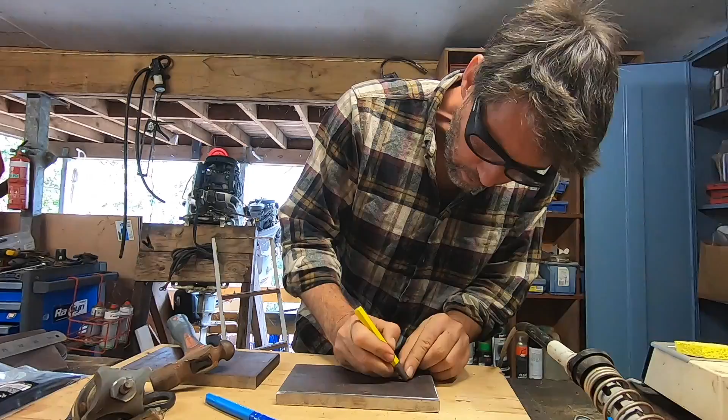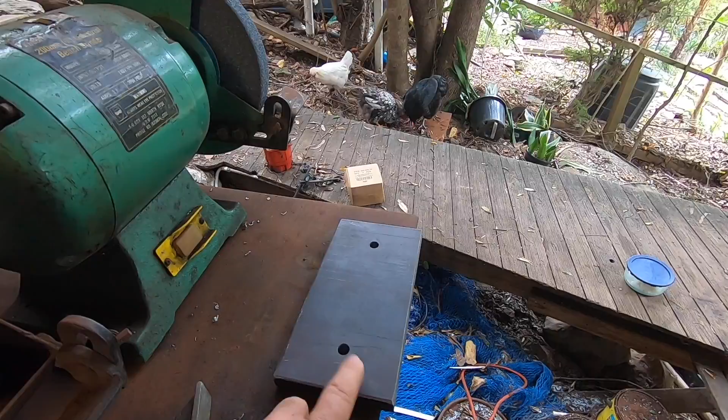Alright, on the way back from Bundaberg I stopped into a steel supply store in Brisbane and bought the steel I needed so I can get on with these engine mounts, so let's get making them. These are the shims, the metal shims I'm putting in. You can see they've got a bit of a lip here. I'm not sure how they were cut. They were cut by the steel supply place, which is why it's such a nice smooth cut, but I'm just going to clean it up so A, I don't cut myself on them, and B, I've got a little bit of a bevel for welding them in.

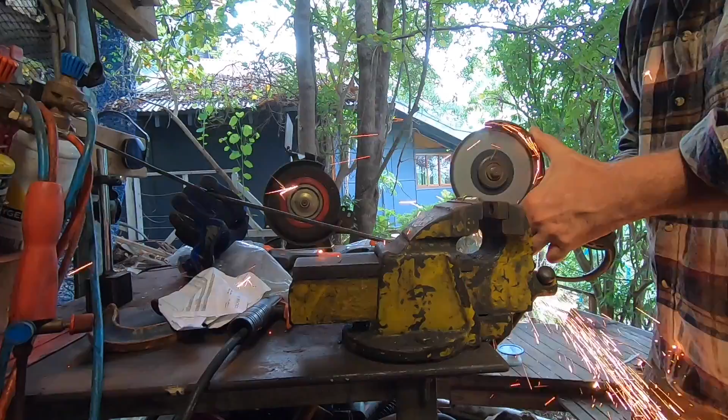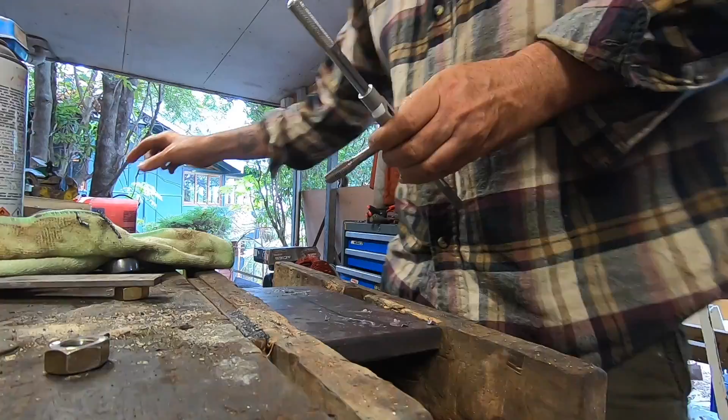Got to say, I think it was $5 a cut, and with thick steel like this, it's money well spent. The time, the noise, the dust, and the cost of grinding discs or whatever, or plasma cutting it and cleaning the plasma cut up, it's just the best $5 you can ever spend getting the steel supply place to cut stuff to size if this is what you're after.

Alright, to do this, I've just put a straight edge on the 8-inch mark, so 8-inch is a little bit over. I think it's 1/8 of an inch. 1/8 of an inch over this side, so they line up, and then just come in 1.5, in 1.5. And that gives us our 5-inch centers centered on the plate.

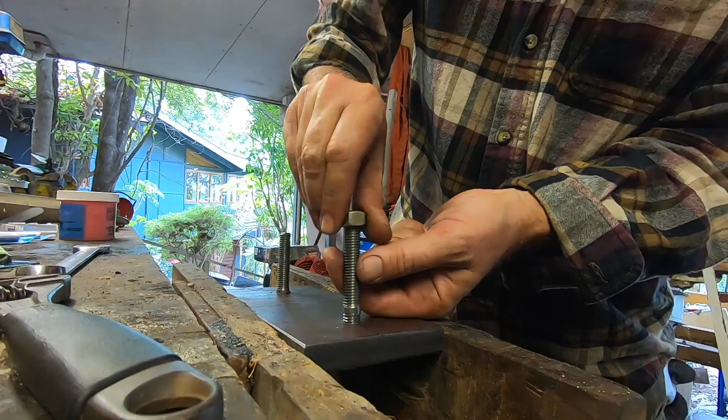Okay, plate drilled up alright, so now I'm going to have a go at tapping these threads and putting the studs in. The studs here are actually too long, so I'm going to put some nuts on them, cut them down, wind them off, clean it up a little bit. Probably just need to cut about 1 inch off, maybe 1.25 inches.

So I'm just going to put a couple of nuts on this so that I can repair the thread a bit when I pull them off, and also so I can put them in the vise when I'm cutting them. Obviously we're cutting from this end because the short end is the end that goes into the plate. The right tool for the job here is the hacksaw, but that takes effort, so I'm going to use an angle grinder.

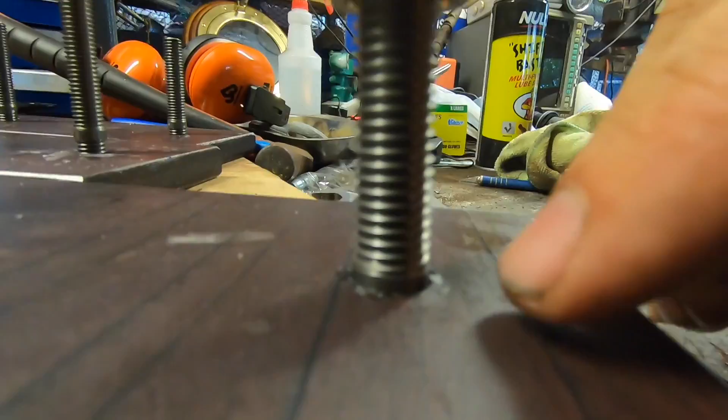These are actually a little bit hard to tap because I think the spec for a 12mm metric hole is maybe like 10.7. It actually changes based on thread pitch. So I drilled it at 10.5. So it's actually going to be a little bit tight, but we'll get there. Yeah, it's a bit too much, isn't it?

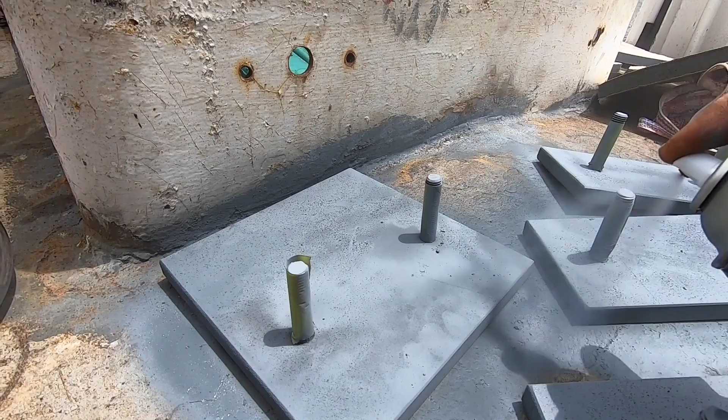I bought an 11mm drill bit as well in case this turned out to be too hard. But I'd rather be a little bit under spec than over, so there's more thread, it'll be stronger. Just means the tap needs to do a little bit more work. Although I've got to say, this Boelube really does do wonders, made the drilling much easier too. I'm pretty impressed with it.

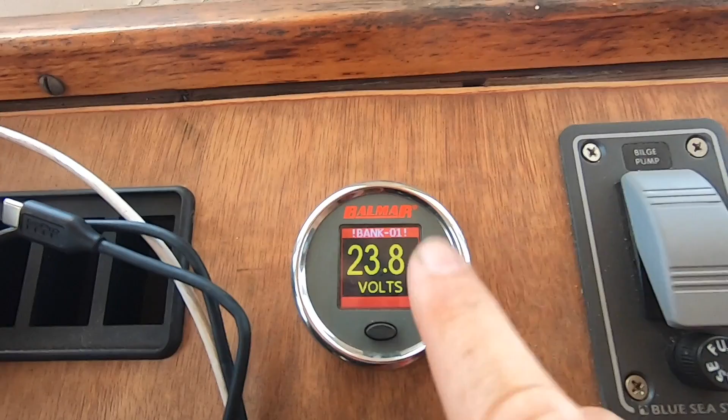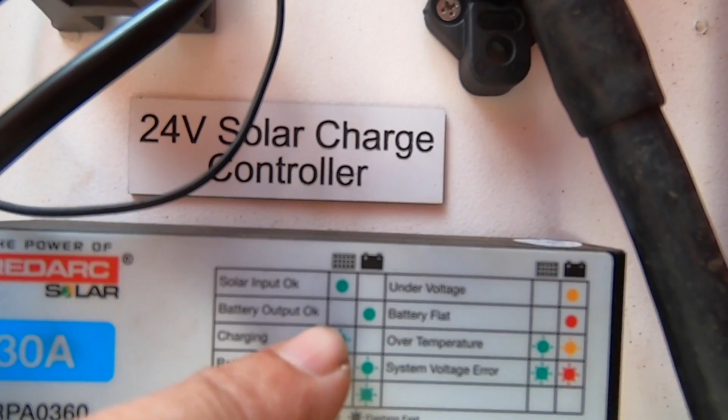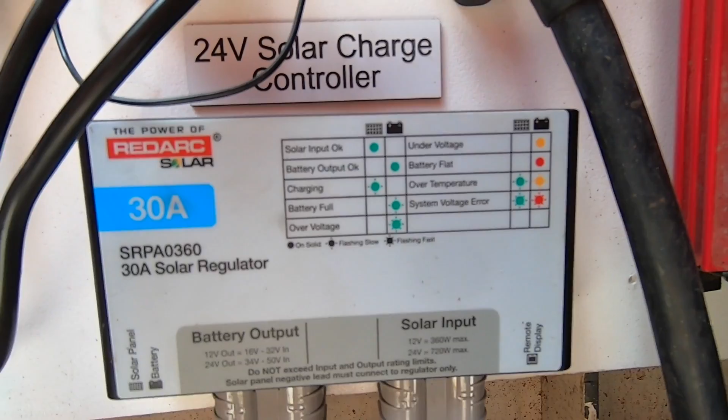Alright, time to put these cut down studs in. I'm in two minds whether to put some Loctite in, but to be honest, I really don't think it's necessary. Could do a little tack weld on the back if I was really worried. I may have issues down the track and want to replace one or two, so let's not go overboard.

I've fallen back into the habit of assuming you guys have all done this kind of thing a million times before, but if you haven't, the idea here is that I'm trying to wind the stud into the base plate. And you do that by using 2 nuts. Put one on, about yay far, put another one on the top.

Then I'm going to use the shifter to undo the bottom one, the spanner to do the top one up, and you kind of ram them tightly in towards each other. Then you can use the top one to spin the stud in or out. Although for out you would use the bottom one. And it just saves buying the fancy cam lock stud tools, which I do have somewhere but can't find.

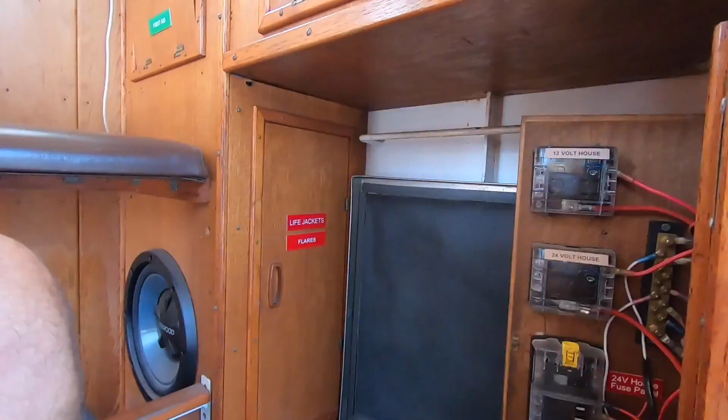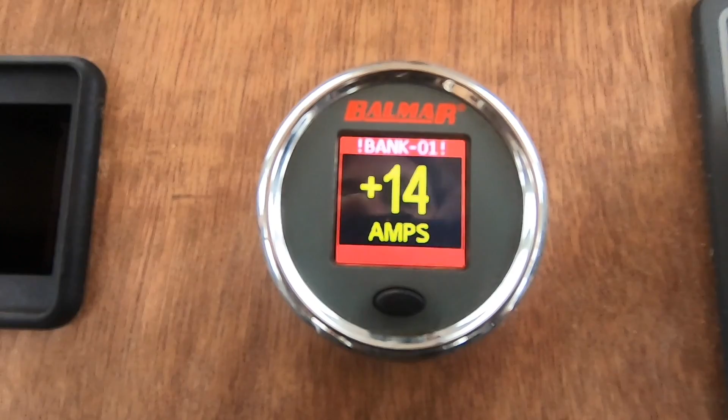Alright, just the big one to go now. The non-threaded part of the stud here is actually bedding into the plate quite nicely. There's no way that's going to vibrate loose. So the plan now is to connect the engine to the brackets to the mounts to the shims, and the shims to the rails. Easy.

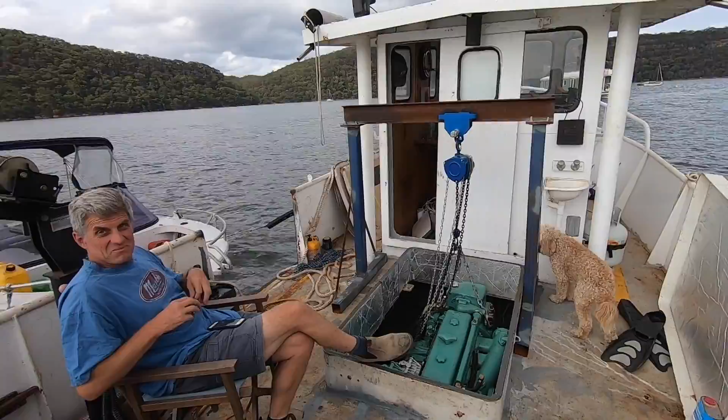As a little aside, I'm getting a warning that my bank 01, since I've been away, has gone low. State of charge 5%. It actually gave a warning, not just a case of monitoring. It gave me an alert. So obviously our solar has had an issue while I've been away. So let's look into that.

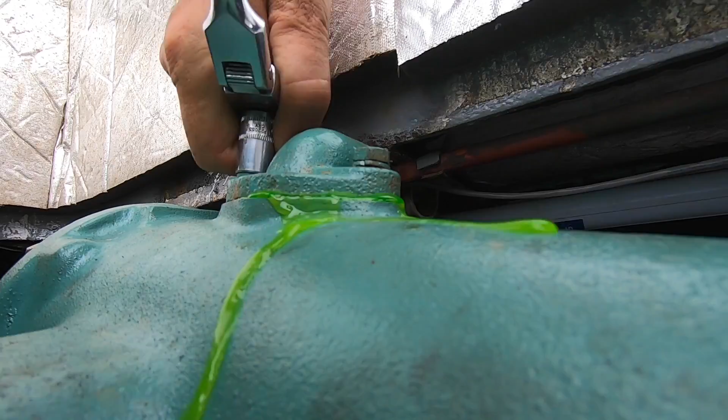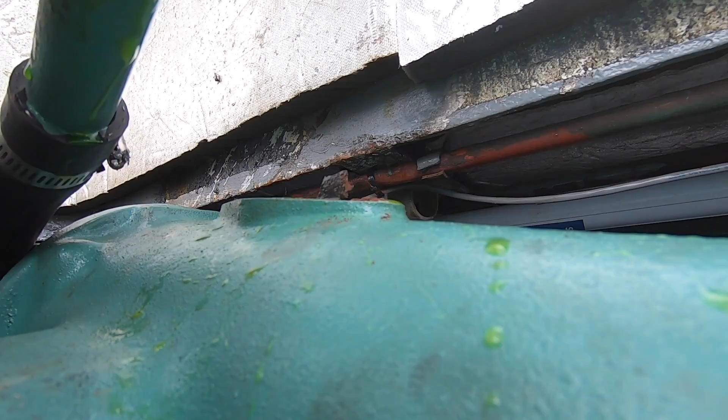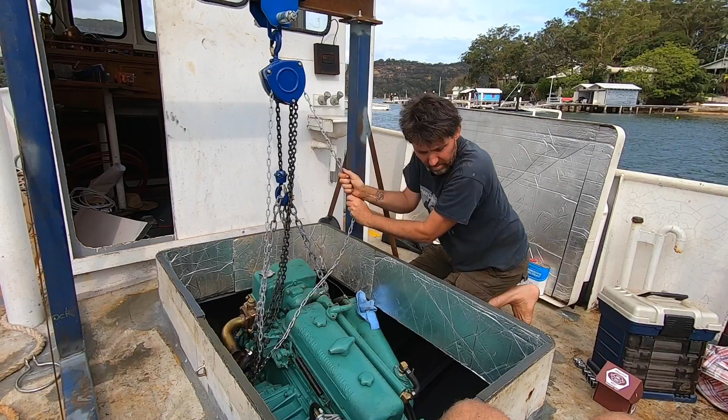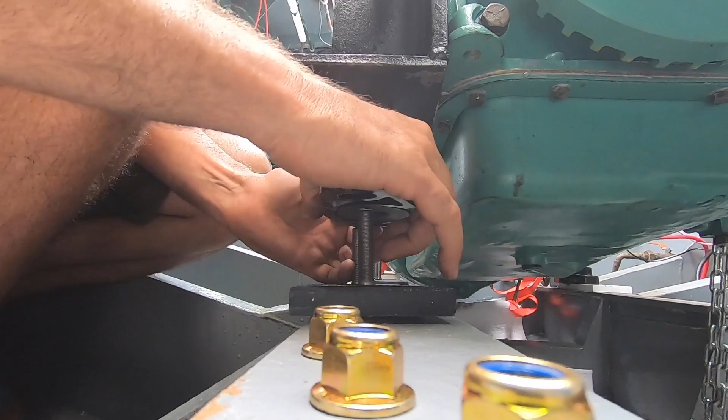So this is a classic case of why boats need monitoring. Here we've got 2 bilge pumps running from separate battery banks, 24 volt battery bank, 12 volt battery bank, both being charged by solar, and water's above them already. So the 12 volt battery bank is charged currently from the 24. So I'd say we've got a flat 24 volt house and a flat 12 volt house, which is why our bilge pumps are no longer working.

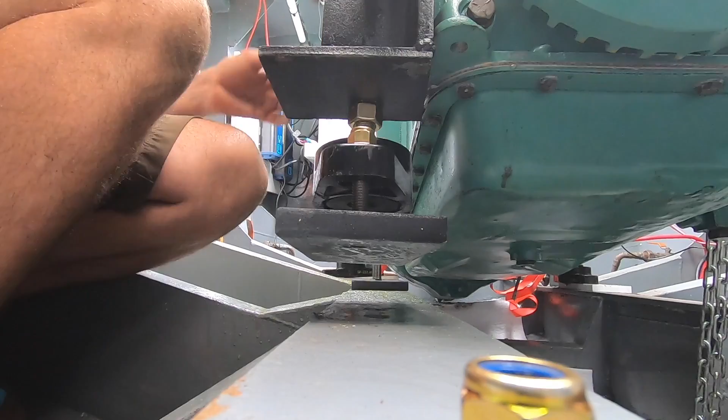Alright, I don't have them set up properly yet, but we do have our battery chargers installed. So I'm going to put one battery charger onto each of the outputs from the generator, run it for a while, get some power back into the batteries, then we'll figure out what's gone wrong. Initializing is where it's at now, just assessing the batteries, I guess. I'm not expecting any huge problem with the starter batteries because they're not connected to anything at the moment. But the house has been connected to these bilge pumps and the fridge the whole time I've been away.

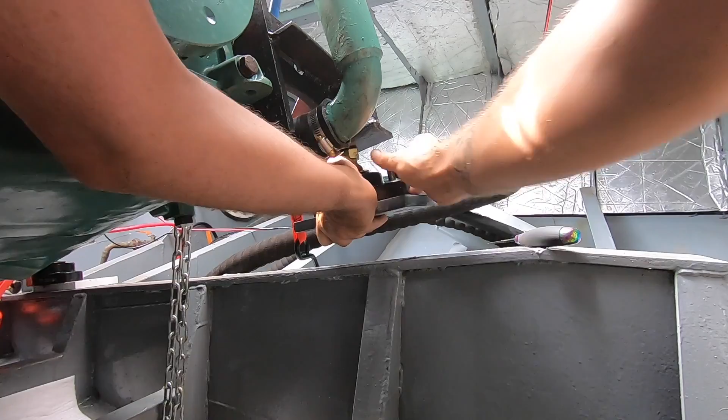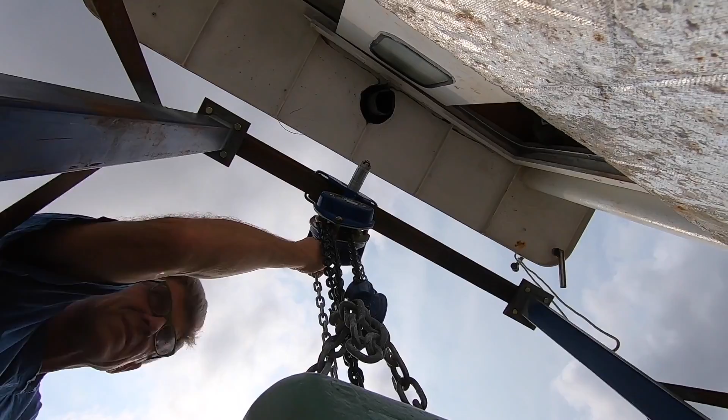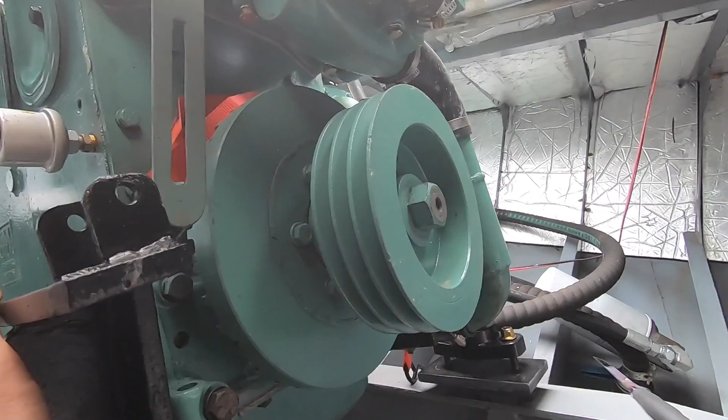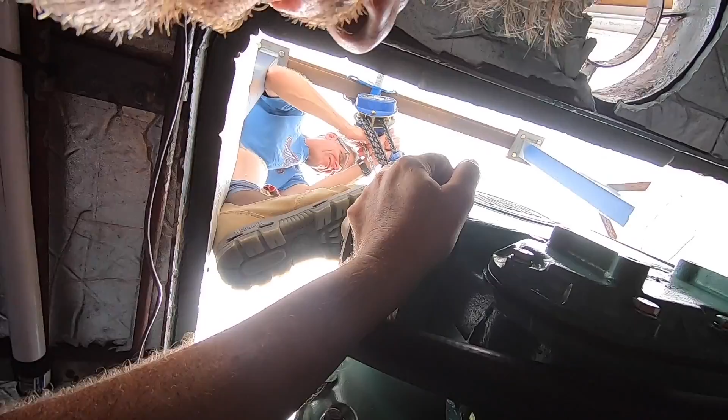Alright, so this grey you can see on the sides is a weld-through zinc primer. That way I can do a weld along here. Then this is an epoxy kind of enamel type thing. So Eddie's here to help get them in. Pedley might help too. We'll see what happens. But we're going to have a bit of a beer and a planning meeting, and then we'll do it.

Thanks. How old is Eddie now? He's getting old, dog. 7 or 8. 7 or 8. Not a spring chicken anymore, Eddie.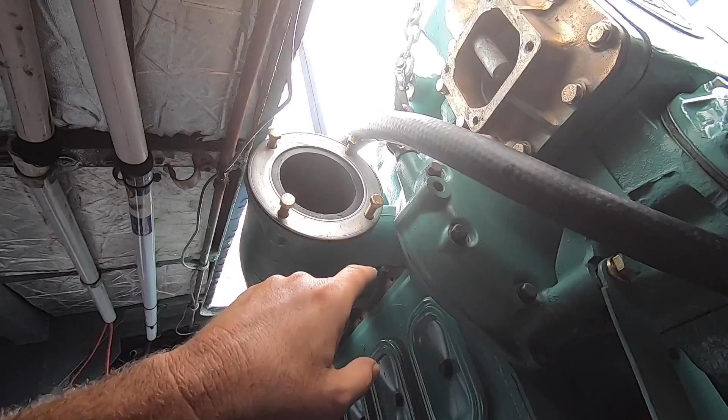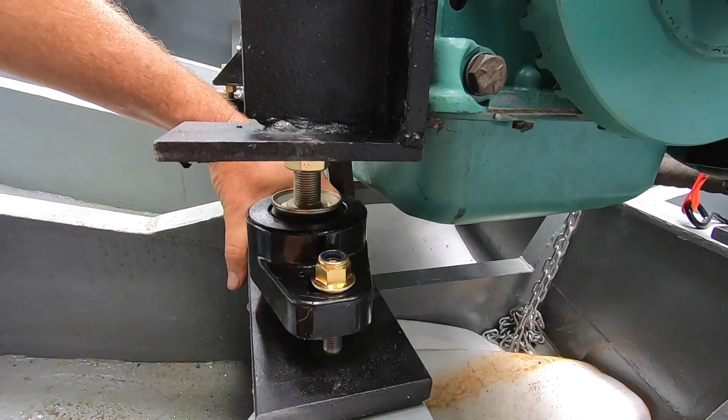The outlet pipe for the exhaust manifold cooling actually leaks a little bit. I've never had it off, so I should put a new gasket in there anyway. But also it hits here, so I'm going to take this off for now. Alright, let's see how much coolant pours out of here. Lots. Oops. There we go, just put that there. So, pretty bad gasket there, but that's okay. Clean the threads, new gasket, grease on the bolt threads. It'll be better for it anyway.

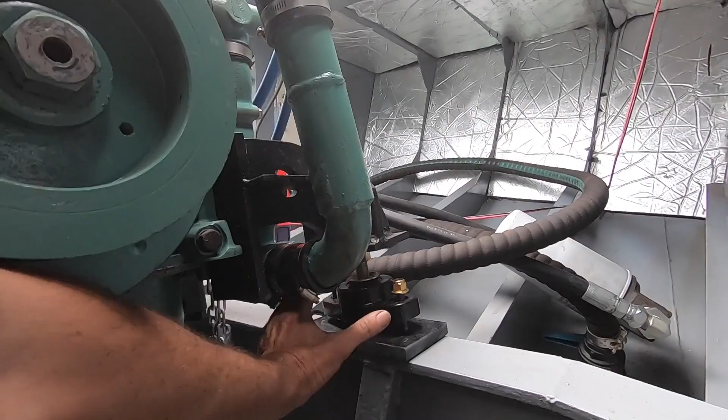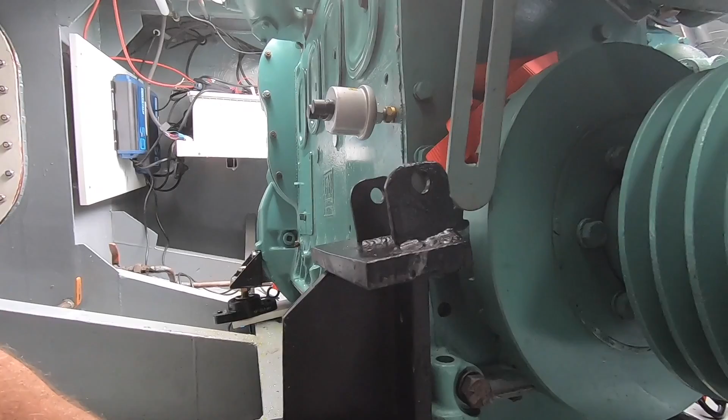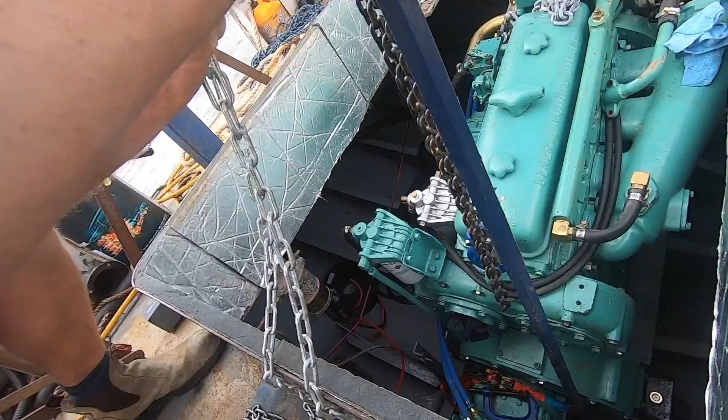Just 2 for now. Oh, 4. Thank you, sir. Yeah, right. Oh, yeah, maybe. Oh, yeah, can you just pull the chain just a little bit more? Which one am I going? The one closest to the starboard side. And so you're lifting up? Yep. Okay, here we go. Bit more? A little bit more. Got it, that's alright. That'll do. Alright, that'll do for now.

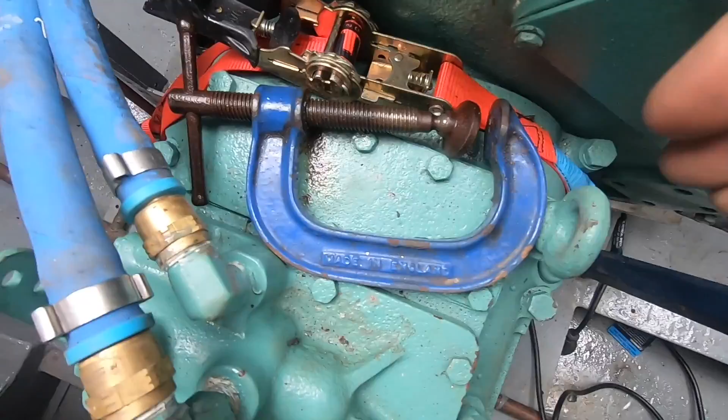Groovy little contraption. It's cool, isn't it? I'm not known for my strength. No. Well, none of us are. But they are. Given that's a ton. Fuck yeah.

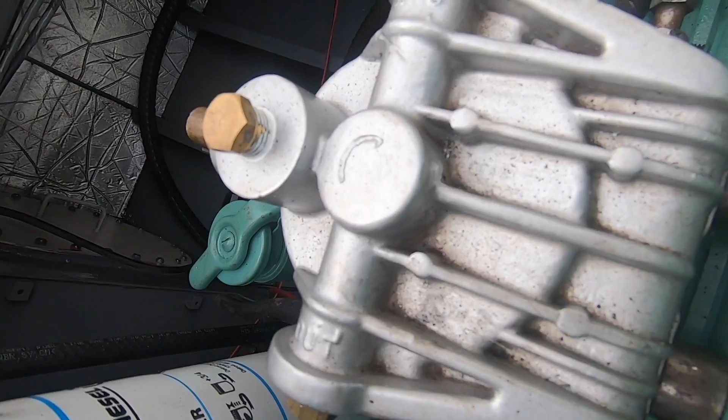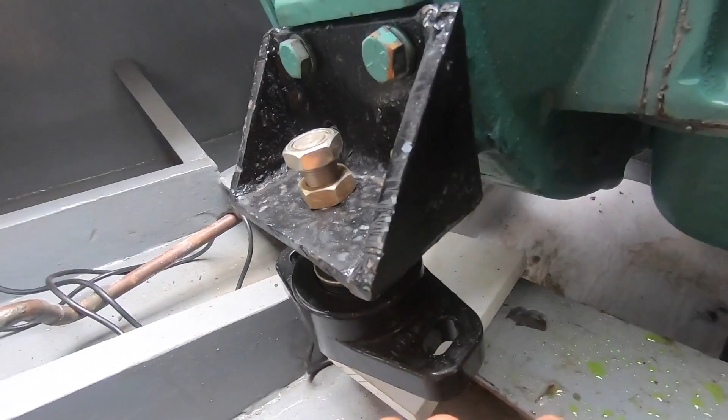Alright, now here's the tricky bit. When you're on the other side, that pulls it down, but I think you've got to give it a bit of a hard jerk to get it to start coming down. Okay. It's sort of, it won't fall, but it will stick a bit. Yeah, that's it. Then if you pull that, it should come down. Yeah, beautiful. Alright, hang on a sec.

I've just got to give it a little shove towards the port side. Here we go. Actually, there is a... Yeah, your foot's fine. So we've got to get it to drop a little bit as it comes down. Otherwise, there's a crowbar in the tinny. Okay. Yeah, let's use the crowbar. Actually, if you push with the crowbar, I can even pull the chain from here.

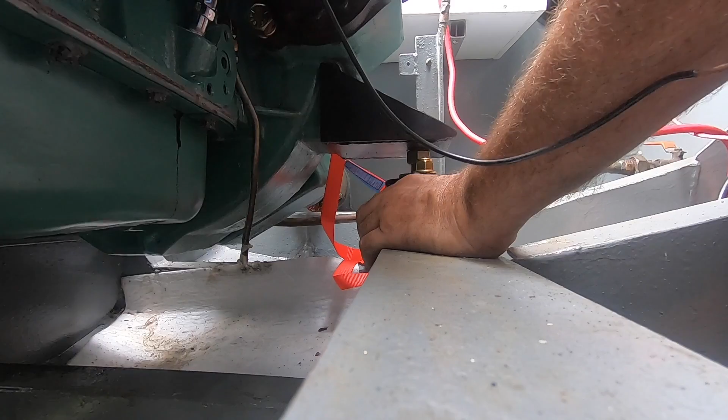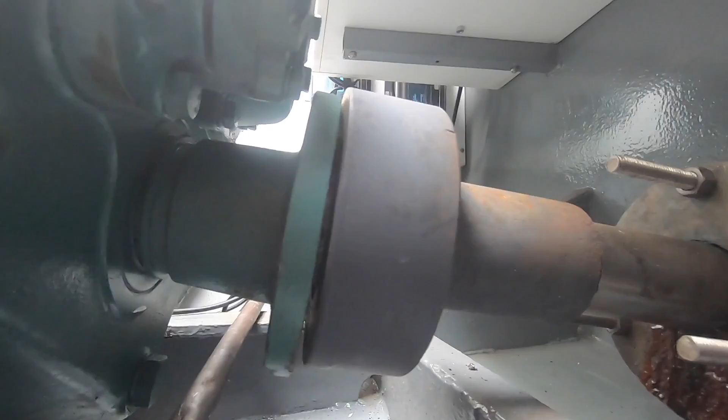If you can get... Nah. Come out here, forward of here. Yeah, right out here, I reckon. Can you get there or not? Yep, there we go. All right. So, can you lower it? Or do you want me to take the other chain? No, are you ready? Yeah. Cool. Nice. Actually, it could even come back a little bit your way. Yeah, beautiful. And down? Yep, down.

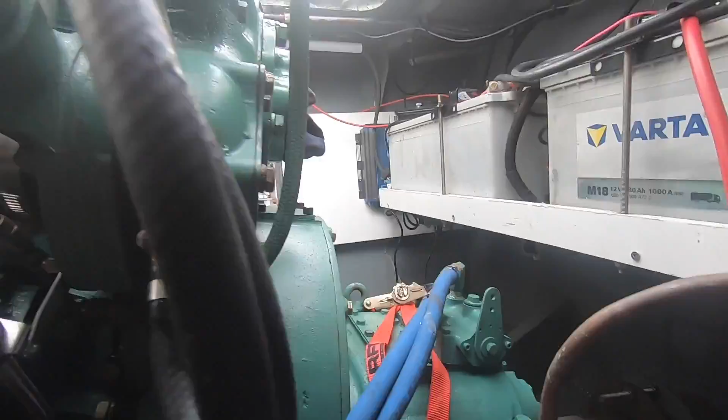Yeah, nice. Perfect. Oh, hang on. Is that sitting? No, it's good. Yeah, that's good. All right, just down. Down? Yep. Hang on a sec. I've got a problem with my crowbar. It's on that bolt. Oh, okay. Can it come out again or not? I might have to take it up again. Oh, it's really stuck. Yeah, okay. Watch out. Ready? Yep.

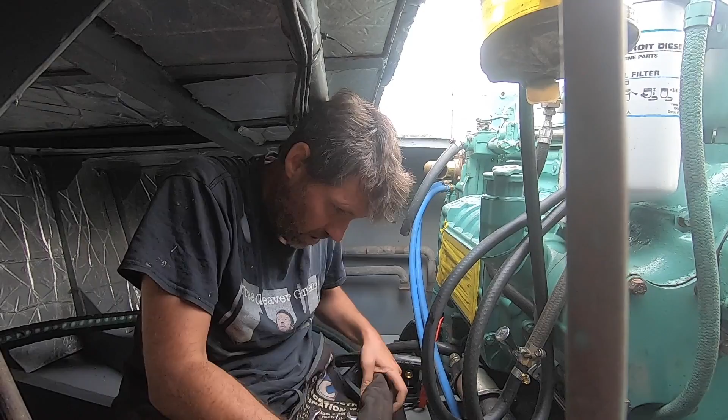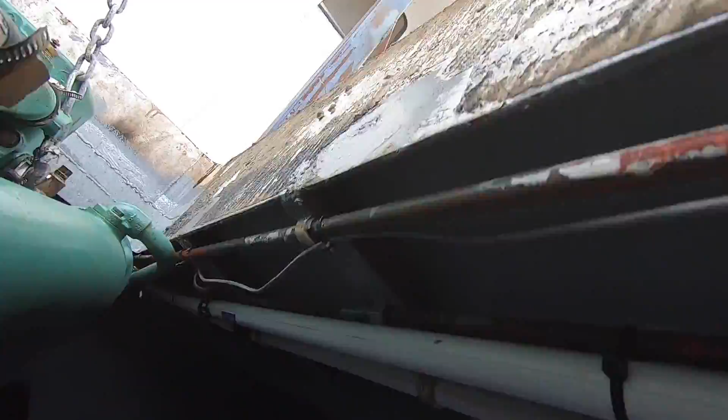Nice. No, that's still pretty good. Maybe just give it a little kick over with your foot if you can. Yeah, it's pretty good. And down? Yeah, down if you can. Nice. More? Yeah, just go all the way down now. Just let it slack off. Nice one. It must be sitting down. Yeah, it's down. Okay. Is there slack in the chain?

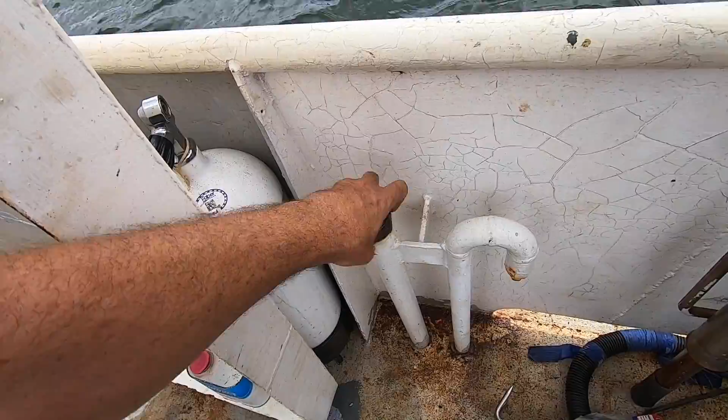Yeah, beautiful. All right, we're going to lift the back of the motor up now, but I'm going to try and push it forward a little bit at the same time. Let's try. Here we go. Is that going up? Yeah, I think so. Oh, hang on. Let me get more slack on that ratchet strap. This is just a ratchet strap I put on to stop it falling off the rail in Bundaberg. One of several. All right, it's got plenty of slack. Let's go.

Yep. Keep going. And more? Yeah, I've got to get high enough to put the mounts in again. Why is that one bigger? Is that a wider plate? No, it's wider because this engine mount used to tuck in under the gearbox, and there was no room to put it that way. So it's now out wide of the rails.

Don't you like working when it's not sunny? When it's what? When it's not sunny. Oh, it's heaps better. All good.

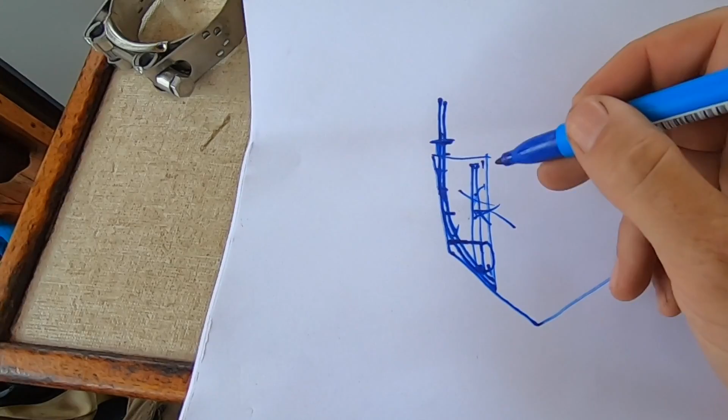What's the worst that can happen? Well, you can't get it out. Chain? Oh, yeah. Got to get that on the big jobs. Alright, that's that one. Come on down. Going down? Yep. I think with just enough slack, we can take the... It's actually looking pretty good. I can see how bad it is, but for the absolute first drop in, it's not too bad. I reckon we just get enough slack on it and take it off now. Okay.

It's off. In the wheelhouse, on the floor at the right, there's a red bag, I think, a tool bag. And there should be a roll of spanners there, the canvas roll up. Can you just chuck me that? The whole lot? Yeah. Thank you.

Dad's here helping me with a bit of installation. Say hi. Hi guys. There we go.

Just getting a few of the last little bits cut that go up under here. We've also put 100 litres of diesel each side, so I'll put the dipstick in again and we'll see what it looks like. Once again, just going to put it in till it rests rather than pushing it at all.

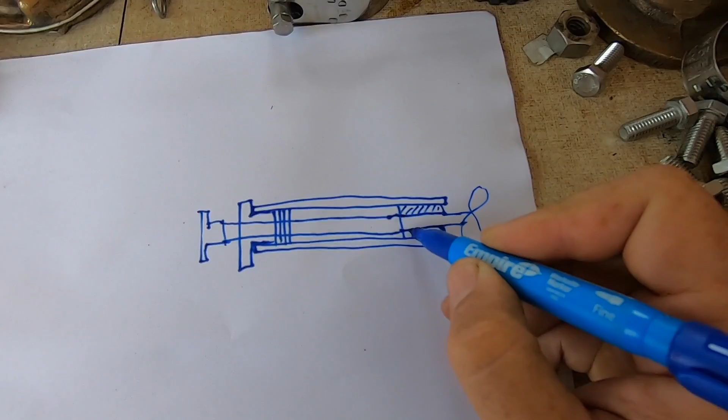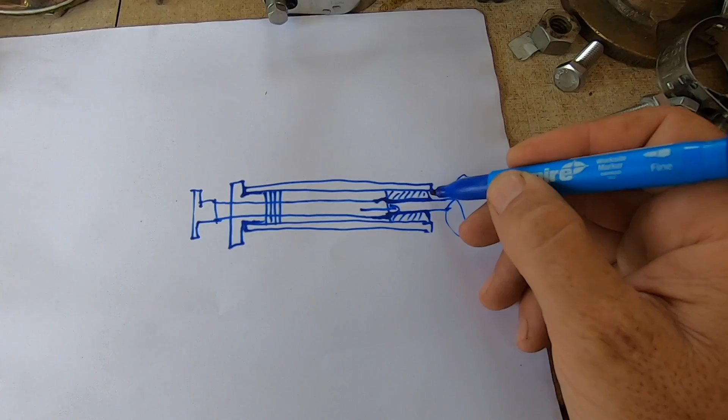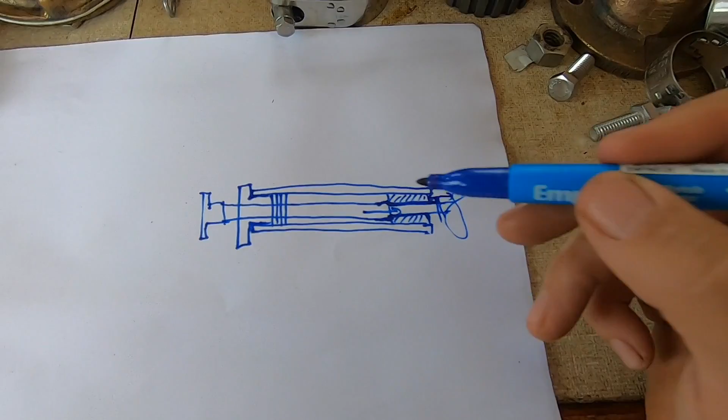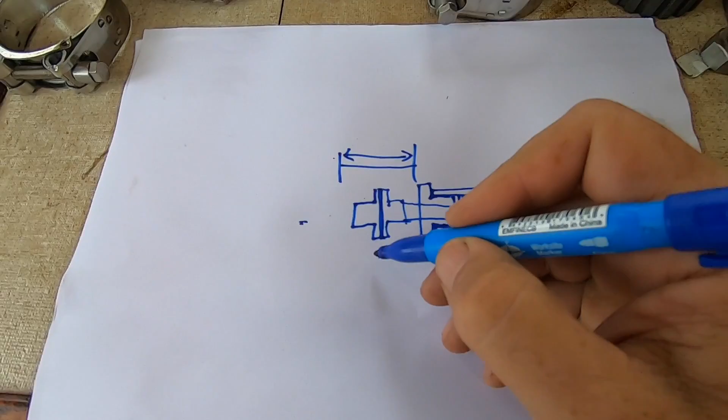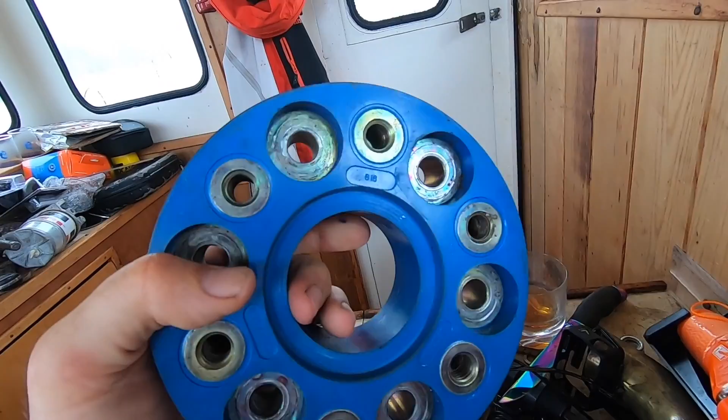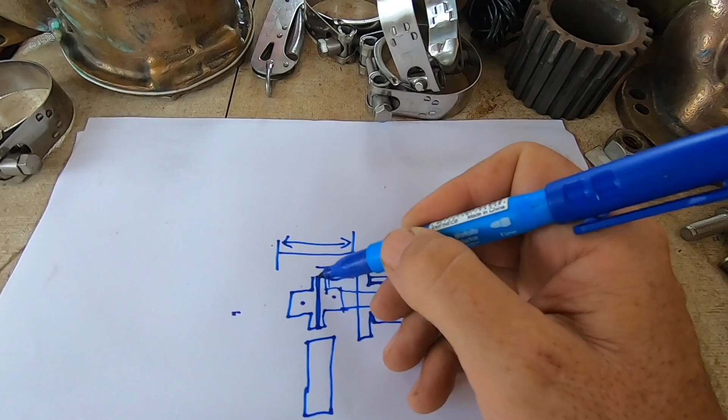Another option is you can get something ultrasonic, that actually sounds through the steel, a bit like tapping on it, and get an electronic reading up at the wheelhouse. I'm thinking that's the way I'd actually like to go. This may be what we do, the flexible stick in the meantime, but ultimately I think a fuel gauge on the dash that doesn't involve piercing the fuel tank at all is pretty much the best you can get.

So we know what we're at. We've got 100 litres, just haven't got a dipstick yet. Fine, definitely enough to start the boat. There's no way 100 litres isn't above the pickup, so that'll get us going.

What I need to do now is start this alignment process. I'm not dragging my heels on it, but I've never done it, and I'm a little bit reluctant about it, to be honest. Don't get me wrong, it's not rocket science. So what I'm going to do is actually start the process now.

It's a terrible day. We're also going to be a bit scuppered, sorry. When it started raining today, I've got the hatch off a bit, but hang on, I'm going to close the door, it's getting that bad.

Despite the rain, I'm going to jump in the engine bay and have a go at aligning the flanges. Now, I'm not going to align them left to right in this dimension, but I am going to align them in the dimension that the bolts affect. The reason for that is when I move it away from the prop shaft, any alignment left to right I do will be thrown out entirely anyway. Although it may change ever so slightly, there is some benefit in getting the angle right while the two flanges are actually up against each other, because this is the problem I'm facing with this install.

I'll quickly show it on paper, because I've described it a few times, but I get quite a lot of comments that show people aren't quite getting the challenges in doing this alignment. So I may as well make that a bit clearer, so that people's comments and suggestions are more relevant to what we're actually up against.

All right, here's a rough idea of what we've got with our propeller. We have a cutlass bearing in here that the propeller runs on. Then this is the stern tube. Now, where this propeller shaft has been running on the cutlass bearing, it's ever so slightly thinner than where it hasn't been, and that makes pushing the propeller shaft out quite tricky.

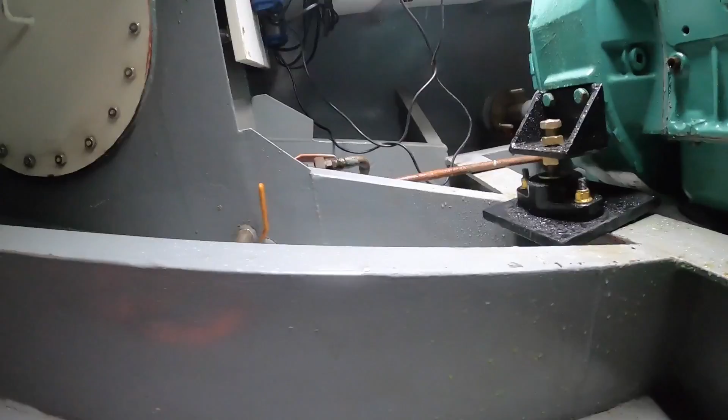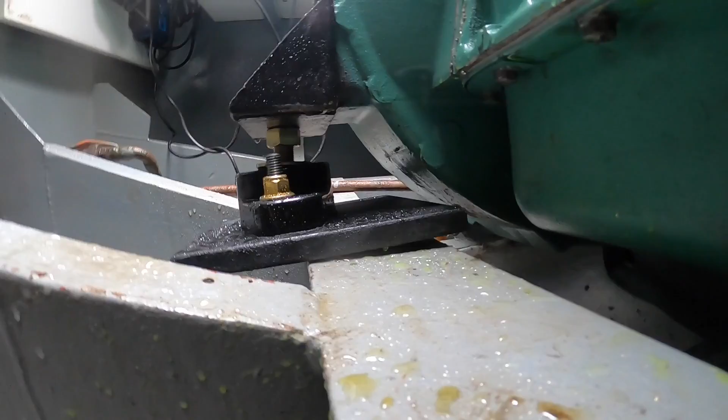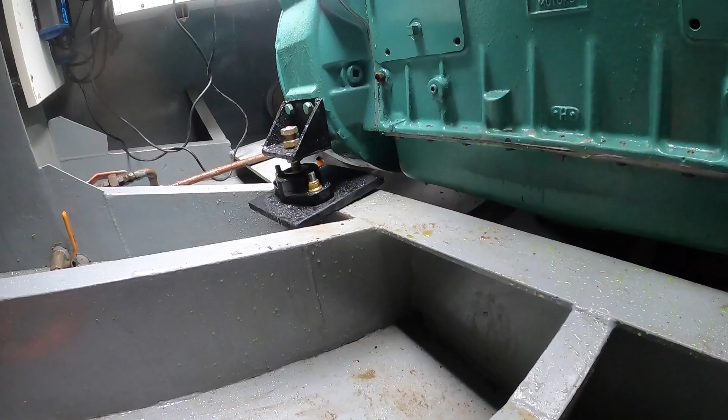We've got maybe 40 millimeters between, well actually what is a rope cutter here, so 40 millimeters between the rope cutter and the cutlass bearing, which means pushing it in further is possible, but only to a very small amount. Then it comes through a stuffing box here, pops out, there's a flange. Then on the back of the gearbox there's also a flange. When you align a motor, you're getting these two flanges perfectly aligned together, that's what you're doing. Trouble is, you've got to move a ton of motor here to do that. Yes, you can have universal joints, flexi couplers, all sorts of stuff.

I don't have room. I've actually got very little room between the back of the gearbox and the start of the stuffing box. If you look at the specs for all these universal joints, dripless seals, all that kind of stuff, I just don't have space to fit them. So we're stuck with the technology we've got.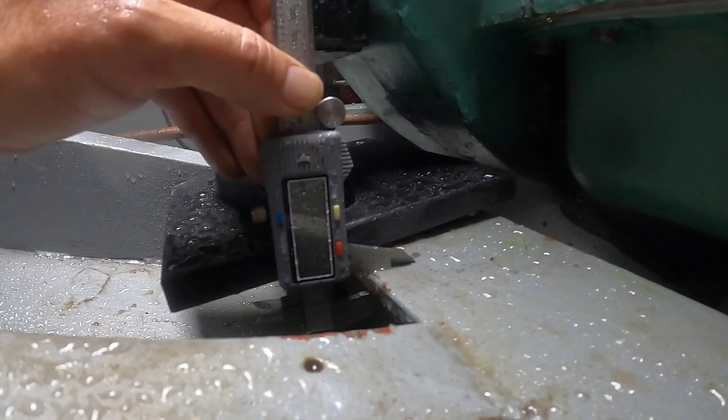Now, I also have a 37mm Polyflex coupler going between the metal on metal, and that's what this looks like here. But apparently these, even though they look really nicely machined, aren't accurate enough to do your alignment in situ. So normally what you do is pull your prop shaft in, do your alignment, push it back, put your coupler in, pull the prop shaft forward again, bolt it up, happy days. That's where we're really struggling with this situation.

Now, at the moment, the engine is very close to touching this. It's kind of slid down the rails and hit this because the rails slope. This means that now actually isn't a bad time for me to do my alignment metal on metal. Then I'm going to physically move the whole ton of engine back, get my Polyflex coupler in, bring it back, bolt it in. No doubt I can move this prop shaft a little bit forward and back. It's not going to be impossible, but it is going to be quite hard. Certainly not going to slide it.

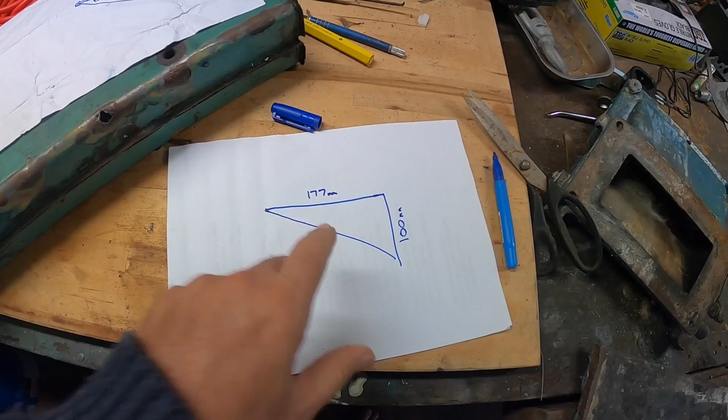So theoretically, I could bolt the Polyflex coupler to the gearbox, which is what you do first because you have to get to the bolts on the backside. Then you can check the gap between the coupler and the prop shaft. Because of the plastic, it's not as accurate, but I think it will get it accurate enough to drive the boat at low revs and move it.

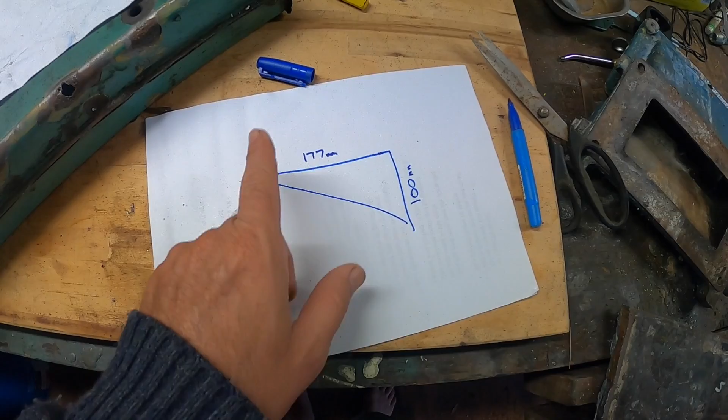There's two advantages to that. One is I could get it on the hard stand, you know, or beach it or whatever I need to do. There's definitely cheap ways around this. The other advantage is that I can fire the engine up and allow the prop shaft to bed into that cutless bearing a little bit and make it a little bit easier to move.

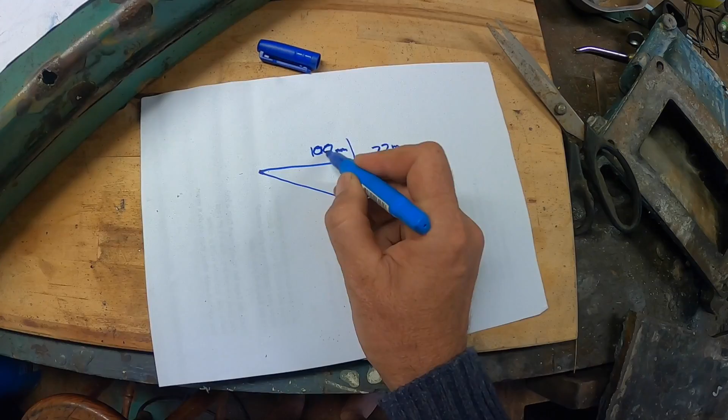It's a tight fit, it's going to wear fast. The prop shaft is stainless steel, the cutless bearing is some sort of fibre resin type thing, I think - don't quote me on that. So we know what's going to wear first. Don't get me wrong, soft things can wear hard things, you know, water erodes stone, etc. But we know which of the two is going to wear the fastest.

So I think there is some advantage to getting the motor fired up and then doing a fine adjustment again afterwards. All right, it stopped raining a little bit, so let's jump in the engine bay, and I'm actually going to start by just adjusting these nuts a little bit, just to start doing it for the first time.

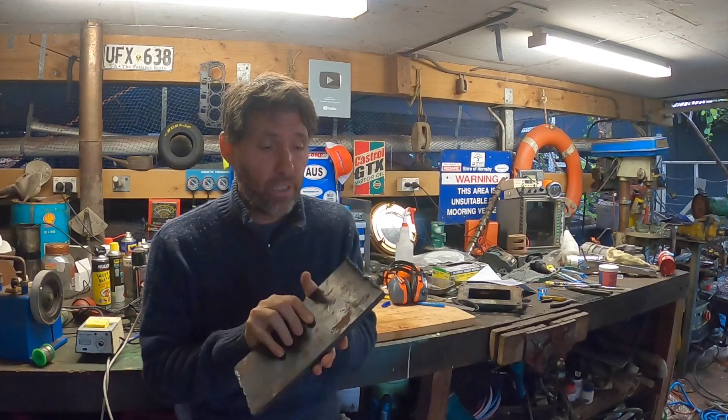I think the trouble is you get caught in this analysis paralysis sort of thing. Let's just get out there, start turning some adjustment nuts on some feet, see how much effect they have, how quickly they affect it. Then you've got a few runs on the board, and maybe coming at the second phase will seem easier. I think, you know, you've got to be in it to win it.

So let's go try. All right, jumping in, it's obvious there's not really any point in even doing that until this overhang cantilevered mount is flat.

So, in order to do that, my thought is I'm going to build the gussets, which means measuring this because I want them to be dead flush with the top, come down, under, and then triangle up. I think I'm going to need to make 2 of those.

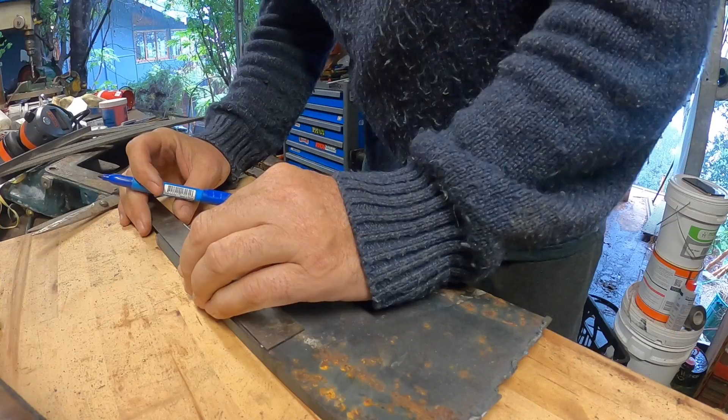I don't know the exact position of that foot yet, but that's okay because they can sit on the gussets and move. So if I put 2 gussets, not coming back any further than this rib - one sort of here, one about here - it means that I can still position this, but at least it'll be held flat and level, and then we can do our adjustment.

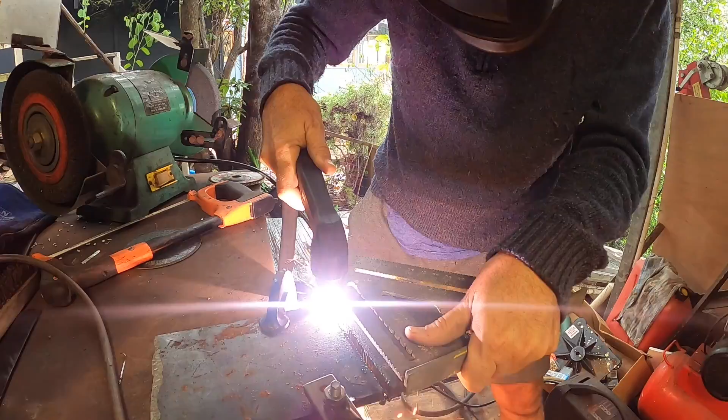So that's clearly just step 1 I've got to do. I don't think there's any way out of this. So, measure this thickness, go home, cut some gussets. What can I do? One step at a time.

All right, calipers are telling me with paint it's 10.2 millimeters. So I'm guessing 10 mil steel with some paint on it.

All right, at least we now know where we're at. Getting way too unpleasant working out here now. Apparently it's going to last like this for a week, so time to do some indoor stuff.

Time to make these gussets for the starboard aft engine mount. I found a bit of steel in the workshop, which is great, means I can just get on and make them now rather than running up the road next week. I've still got to run up the road to get some tubing and everything for making the exhaust, but that's another story. Even D-Squad's hiding under the house to keep out of the rain.

You in there somewhere? Who knows?

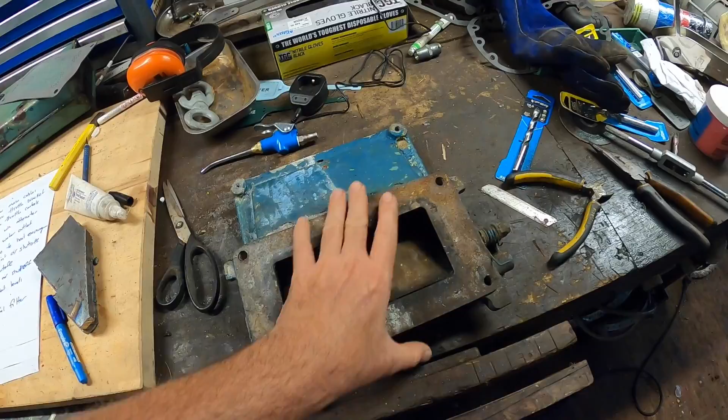Alright, so here are the main measurements for our gusset. For the last 77 millimeters here, we need to come 10 millimeters down, and it's 77. So this is 100, and 77s to here. So this is what we're going to make. Heaps long enough, good. So I'll mark up the 2 triangles and cut it.

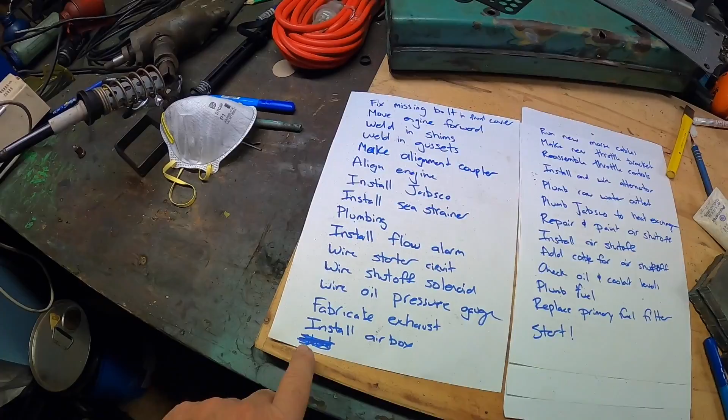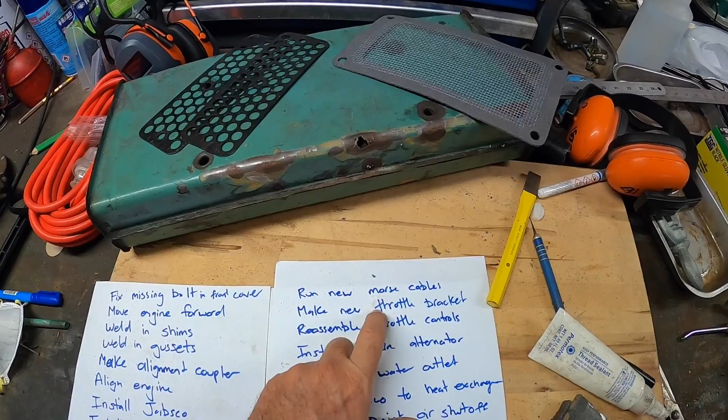What have we got here? 113. Slightly annoying, be good if this was 100 mil thick. I might actually cut 2 gussets that are 177 across and then all the way down to the corner, and then I can always trim the corner. That's probably better than trying to do a long cut through the steel.

Alright, first thing I do is just clean up the slag from the old plasma cut on this, so we've got an edge to measure against, to measure from.

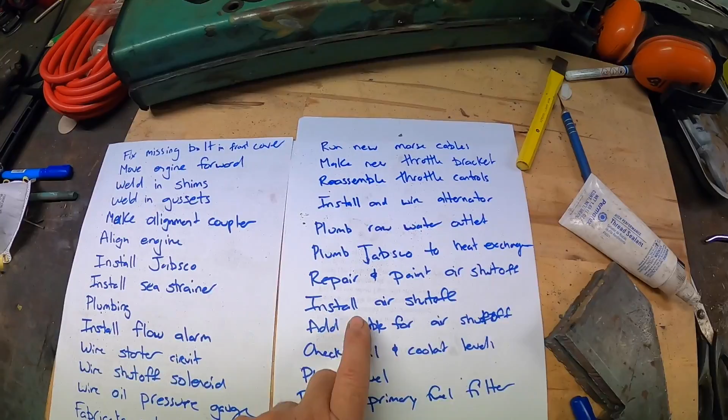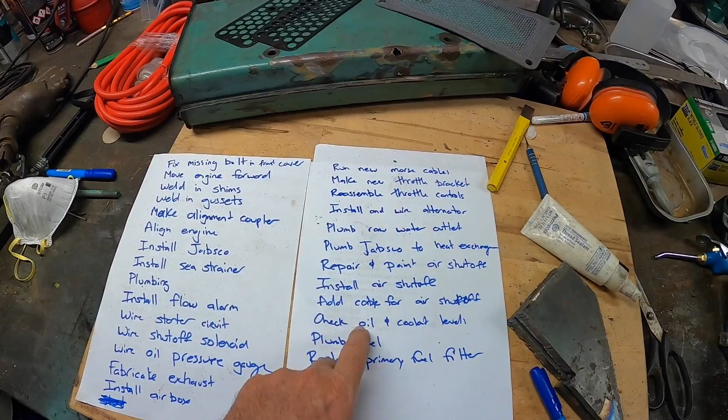That reminds me, while I was up in Bundaberg, Damien and I found these earmuffs in Bunnings that have a Bluetooth connection, so you can listen to music while you're working, which I think is a really good idea, because A, it stops it getting boring, and B, it means you've got motivation to wear PPE. You know, when I found those safety glasses that were also reading glasses, I found I wore them a lot more because I needed to wear glasses anyway, so it ended up working really well. Damien and I could just whack the headphones on, grinding away for hours. I could be listening to some Iron Maiden, he could be listening to his Def Leppard, and it was actually really good until we started having troubles with dissimilar metal. Sorry.

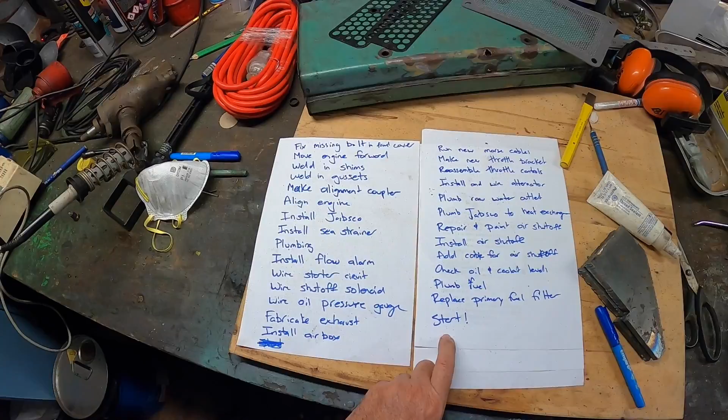So 177 millimeters. So this is our cutout. 77. Alright, there we go.

Got my gussets roughly cut now, still need to get a grinding disc onto them and clean them up, but you get the idea.

Alright, a few things to talk about before we wrap up. I solved my charging problem by putting a new solar charge regulator in. I had actually fried it, I'm pretty sure. I was putting the main starter cable, which is an unfused cable, and managed to short it against a negative, which then welded itself there. It took a while to get off, and I think that's what killed the regulator, so kind of my bad. Anyway, it gave me a chance to upgrade that from a PWM to an MPPT, so we get about an extra 15% charge efficiency anyway, so that's cool.

Alright, last thing I want to talk about before we wrap up is what's left to do. I made those 3 to-do lists quite a while ago. I showed you guys, like pre-launch, pre-starting, and sort of sea trial stuff, I think it was. I can't find where I put those, of course, but what I want to do is go through what I have to do between now and starting the engine.